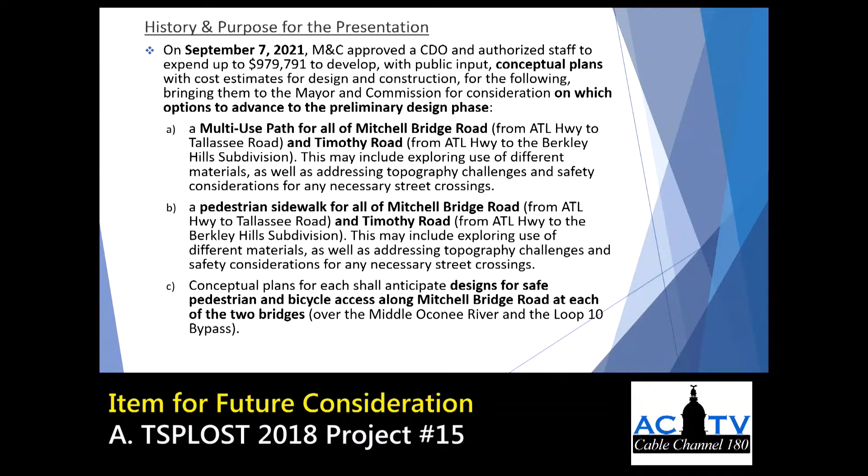We'll stop right here. On September 7th last year, one of the activities that y'all under CDO asked us to take a look at was multi-use path, pedestrian sidewalks, and bridges on these 2 corridors. So that's really the part of the effort that we're bringing to you tonight. We'll also bring back in a future consideration the $1.5 million that you set aside for some additional activities, considering some of the previous work that has been done. That's a future presentation that we'll bring back to you.

But for tonight, we'll just focus on the Mitchell Bridge Road and Timothy Road section. There's an area map that shows existing conditions. You see the existing sidewalk on the north end of Mitchell Bridge Road that parallels the creek, and it's in between the road. We'll have some environmental concerns there.

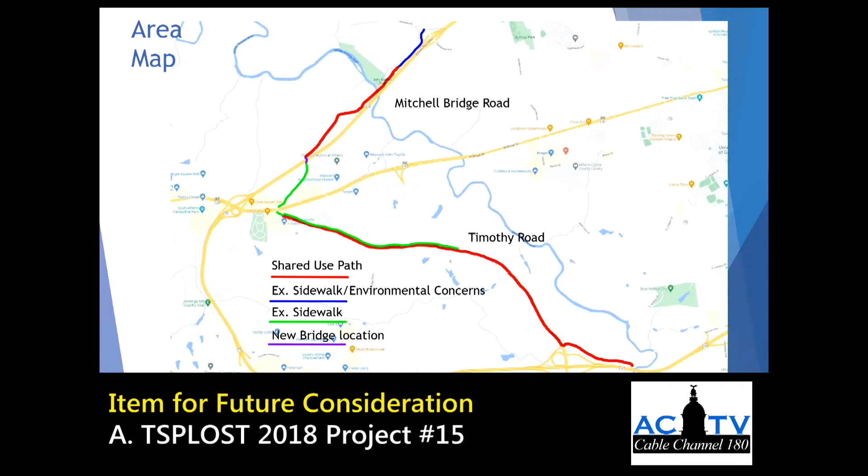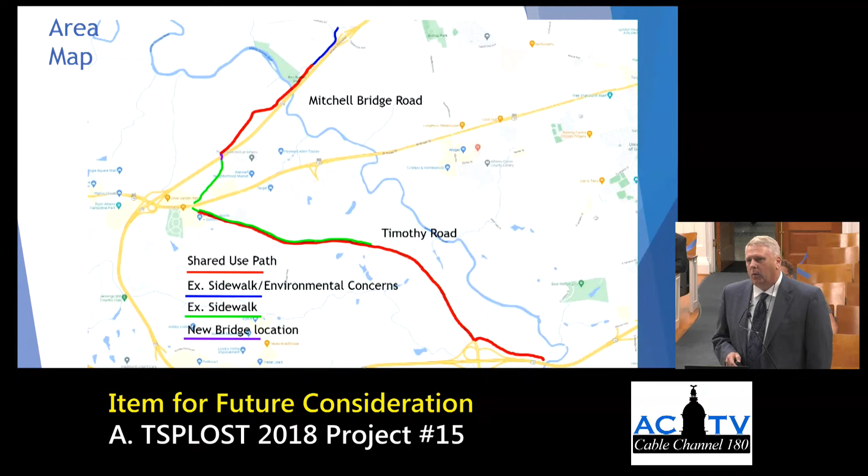Again, the red area along Mitchell Bridge Road has no facilities. For a bike ped facility across the loop on Mitchell Bridge, we would need a new bridge. There's not any existing facilities on the current one. From there into Atlanta Highway proper it has existing sidewalks on both sides. And then again from Timothy Road, from Atlanta Highway down to about Skyline, there's sidewalks in some places on both sides of the highway, and the roadway in some places meanders back and forth. Just a general overview there.

They say a picture's worth 1,000 words. These are some of the conditions along Mitchell Bridge that we would have to tackle. Of course, there's existing sidewalks in some areas, with no sidewalks at all or any facilities in others. The Loop 10 bridge and approach is very narrow, and it's through that curve. It's very hard to retrofit that structure unless you put a bike-ped-only bridge there or rebuild the entire structure. And then you have no facilities down to about 500 feet north of Ben Burton Park. Then there's that existing sidewalk that I mentioned a minute ago that just parallels the creek all the way around to Tallassee.

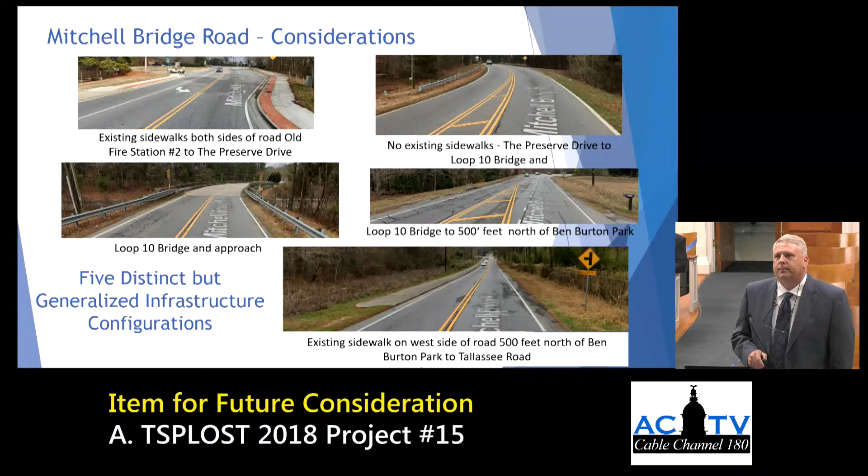Some of the considerations, again, are how do we utilize some of our existing infrastructure. One consideration would be to use what's there, of course, and then think about the loop. The connectivity across the loop, whether it be a standalone bike-ped bridge or a joint project with Transportation and Public Works to redo that structure entirely, you could build back and put bike-ped facilities on that structure.

One of the things that's moving now is going through the MPO process. I believe the mayor had an opportunity to speak with the DOT commissioner, and he's asked to look at Atlanta Highway, Mitchell Bridge Road, and Timothy Road as a planning effort, but wants it to go through the MPO process. So that's a future consideration that will be coming through, and it's moving through the MPO process, I believe, as we speak. We're also trying to utilize existing cost savings to figure out how we could use the bridge over the river without having to build a standalone facility or add on to that facility.

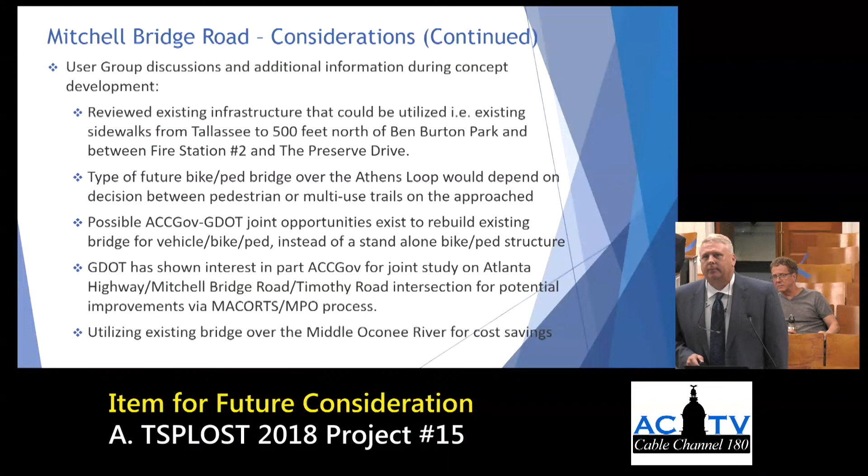Looking at it with bike ped facilities, the AIM plan, we went back, it's at comfort level 4, which is not comfortable for cyclists. When you consider some future projects like the Loop 10 Bridge or the Atlanta Highway interchange, some bike facility improvements may be better held to future considerations to allow those other things to mature.

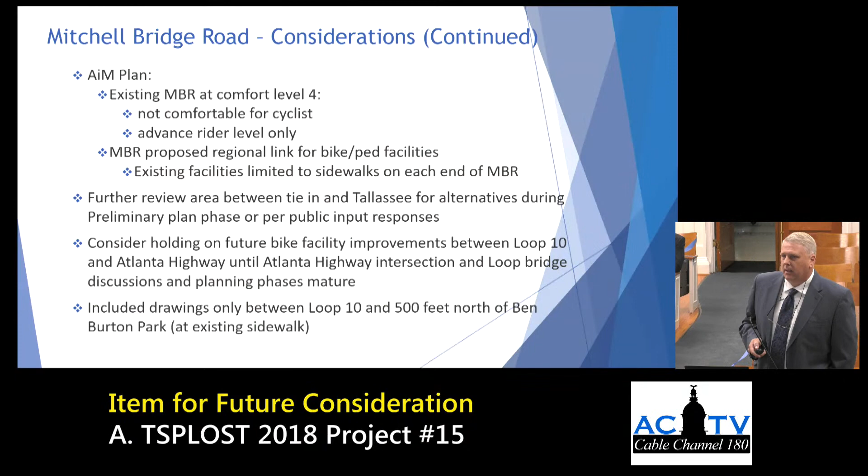So here we provided drawings between the loop and that existing sidewalk just north of the park. That distance is about 1.5 miles, and you can see the loop, and then all the residential components north of that, and the one subdivision and a little bit of duplex type structures on the south side of Mitchell Bridge.

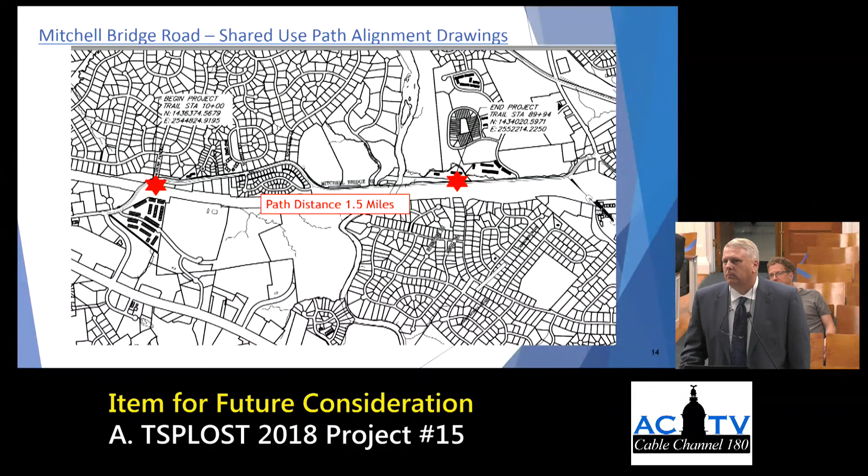Some engineering, some typical sections of what you're seeing. Can you go back to that picture so I can understand better? This is a path, this 1.5 mile path, on the top side between those two stars? Yes, ma'am, on the top side of Mitchell Bridge, on the north side. Okay, thank you.

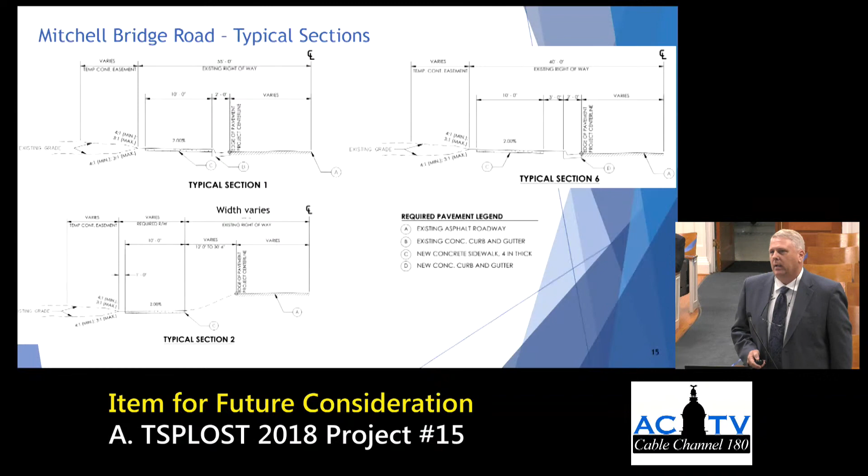One of the things y'all asked us to look at was, as we look through conceptual drawings, to look at the topography and how it may connect to who's connecting to it. So we took a deeper dive than normal conceptual drawings on these, and developed typical sections. There are several of them along through there. You can see typical section 9.

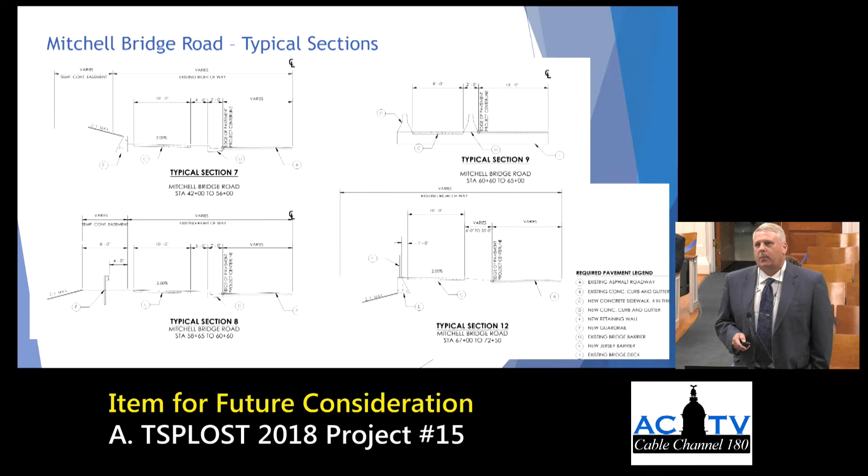That's where we've shown that we could put an 8-foot shared use path along the bridge over the river by putting a physical barrier there and moving those travel lanes inward. So several types of configurations there that we'd have to take into consideration.

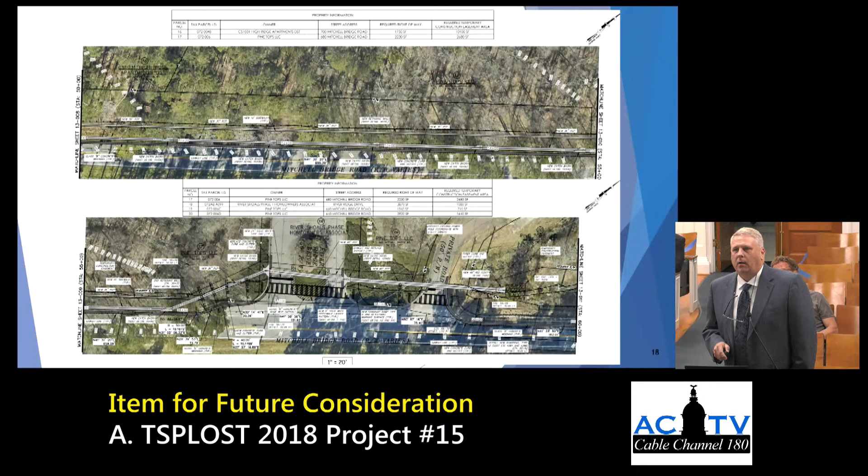Just another typical component, this one down near the curve. The apartment complex is on the top sheet. It's hard to see in this clip, but what we're trying to show is there's an extensive topography challenge there, so we can't push it too far off the roadway.

If you can't push it far off the roadway, what other things do you have to contend with? All that curve in there is super elevated back towards the north, so mainly it's pushing the road water to the top of the page. We had to pick up curb and gutter, drainage, that type of material through there, and that's a heavily steep slope we'd have to pull back a significant retaining wall to handle.

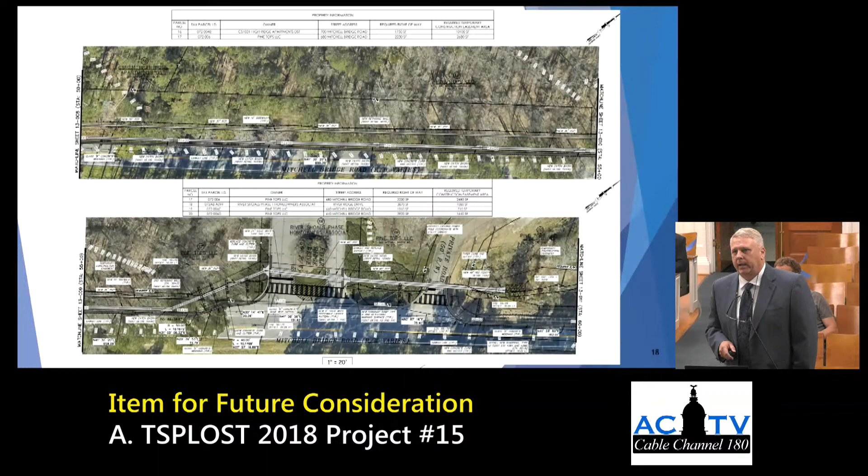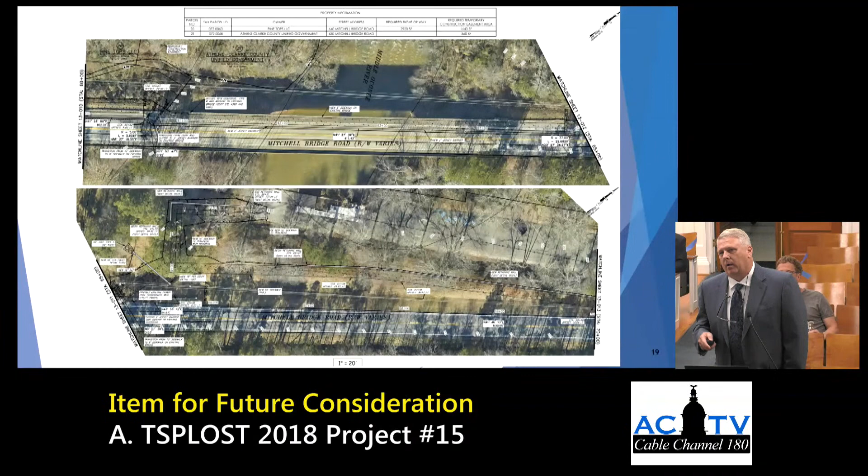The bottom half of that page takes you on up to the park. So that's some general and a little bit of specifics about that corridor area. From a construction cost standpoint, for a shared use path including a bridge for the whole Atlanta Highway all the way to Tallassee, conceptually we're estimating about $17.4 million.

Of course, when you go to the sidewalk-only option that you asked us to look at, reusing a lot of the same alignment, but then you remove the areas that already have an existing sidewalk, so you would have no cost there.

And we've also included a cost of the standalone bridge there as well. So if you only wanted sidewalk, you could have that connectivity, excluding the bridge, for a little less than $5 million.

And that would make that corridor completely pedestrian friendly, again excluding the bridge. But to do the shared use path, it takes a little bit more to get there. When you say excluding the bridge, there would be no way to actually walk safely across without spending money on that bridge, right? Correct. So I'm curious where that sidewalk-only estimate doesn't include the bridge. The shared use path does include the bridge, and the bottom total at $8 million includes a bike pedestrian only bridge, including the 4.8 with the sidewalk.

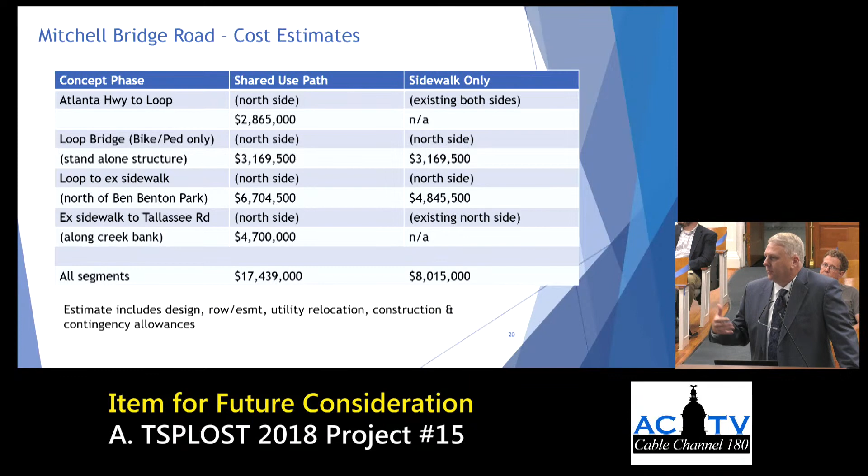And we even took some time to look at possibly what we could do on the other side of the road. Then you start looking at additional drainage, tying in with DOT. When you're talking about a shared use path, preferably 10-foot wide, that's building a whole new lane. And then do you move the curb line to get that separation that you want? So there's several considerations.

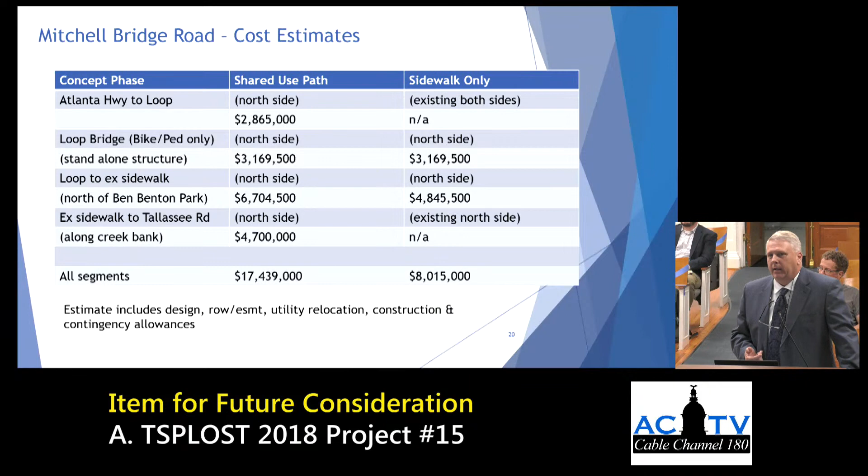It's a high estimate, but there's also, at a conceptual level, along that creek bank, if you built a retaining wall to widen it out, not only is it an earth retaining wall that we need to look at, but the creek there, we want to make sure it's properly designed below what we call scour level to make sure the creek doesn't wash it out.

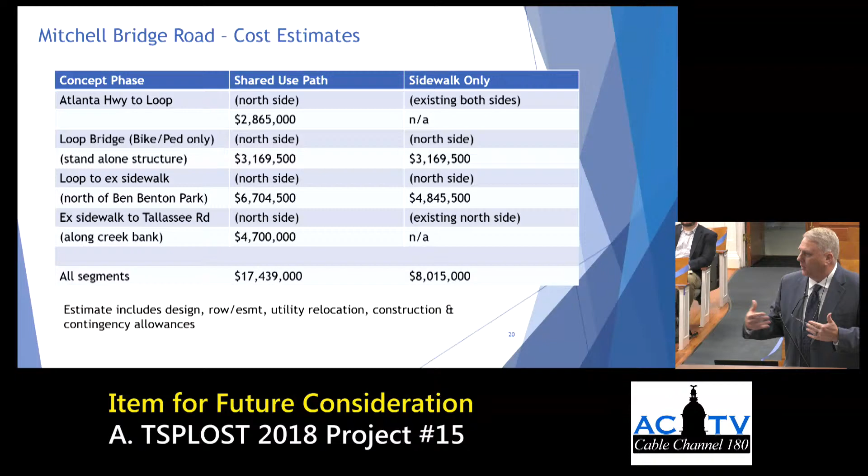So I don't say it's elevated, I just want to say it's an expensive concept, something we'd continue to look at as we move forward if that's the direction we take. And we also considered that, just like the bridge over the loop, there's a future project or consideration for a concept. We also know that, working with Transportation and Public Works, there's the Tallassee Road intersection tie-in, how that may work or widen, that intersection.

So there's a lot of moving parts there. We just want to get to a point where y'all feel comfortable that what we're doing is moving forward properly with the dollars that we have, and I don't want to say just forecasting the what-ifs, but we just want to be careful with that.

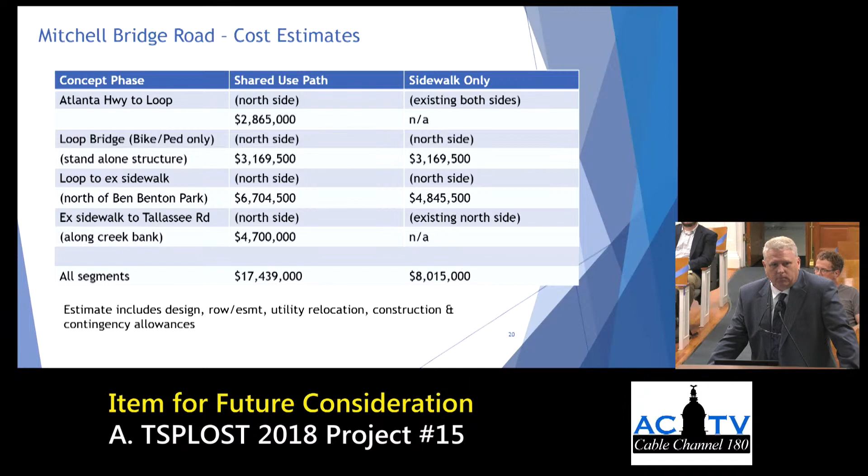I appreciate that, and thinking about this, I'll grab Mike. When I worked out on the corner of Tallassee and Mitchell Bridge, I'd often ride my bike to and from near downtown where I live, and would ride on that sidewalk with that extra protection in both directions. So if we were to think about sequencing and phasing this, I might make a pitch for just retaining the existing conditions there in the near term, and looking towards some of those other segments that are going to attach to neighborhoods and get us safely over the loop too.

Yeah, and I think I would concur with that, Mayor, that it's important to build the connectivity first and then go from there. I know in the Missing Middle report, they targeted this area as part of one that could see some of the Missing Middle type activity, but it's not walkable. And they noticed there's potential there for that.

And I'll say this, and Blaine's probably going to jump across here and choke me when I say this, but have we looked at, and maybe this body needs to consider, in some areas where we're trying to create connectivity, should we not look at the materials being used in order to get to the price, in order to meet our budget? I mean, I know asphalt is not the ideal thing to use, and it does require a lot of maintenance, but it is a little bit cheaper than the concrete we see today.

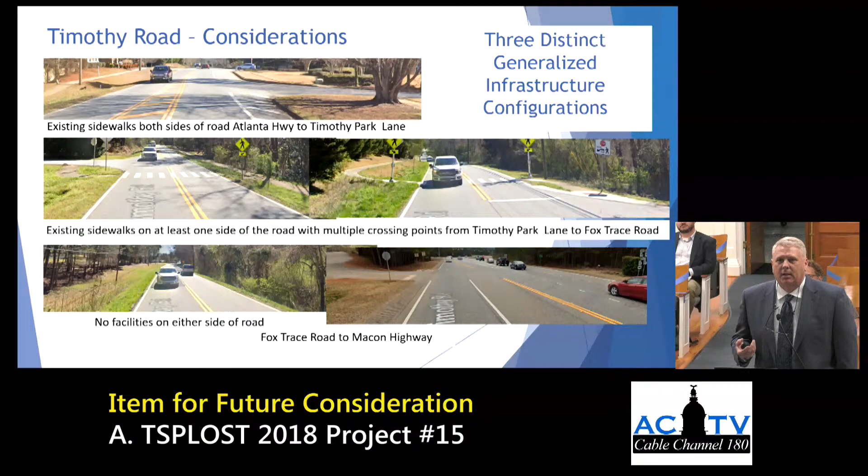And then we did the same thought process on Timothy Road. Again, there's several different categories - general considerations, existing sidewalk on both sides, existing sidewalk on one where it crosses, no facilities at all. So you've got a variety of that type. Again, some of the user group considerations - utilize existing infrastructure, and again the joint interest of GDOT with the interchange or the intersection at Atlanta Highway.

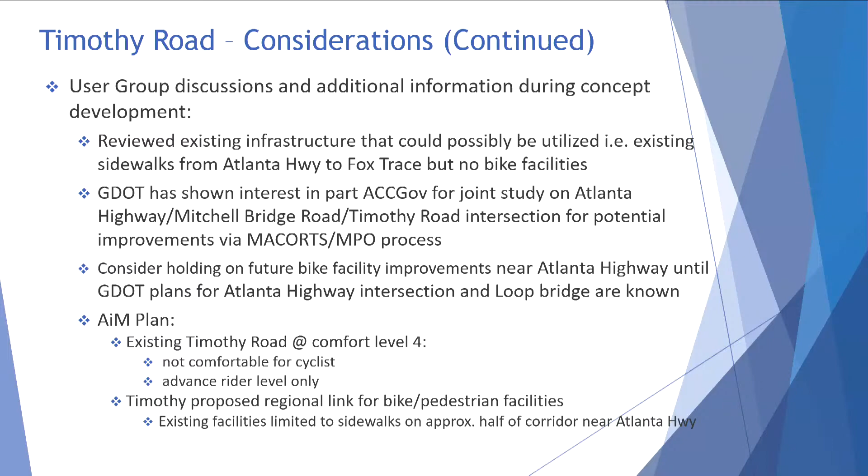Looking at the AIM plan, what level of comfort's there, it's not comfortable for cyclists. So there are several considerations we took into account. We did take the opportunity to walk every one of these. So it's not that we just looked at it from a high level, we put boots on the ground.

We broke this corridor up into 3 different sections. There's basically from Academy down to Skyline, and then we developed 2 alternatives between Skyline and the Loop. Then you've got Timothy, the remainder of Timothy down to Macon Highway.

The terrain, topography, existing utilities, those kind of things just brought us to the point that those seem like the reasonable alternatives to put forth.

You can see the mileage there in between. The difference between alignment A is all on the south side until you get to Timothy and the Loop, you cross over, and then you're on the north side of Timothy down to Macon Highway.

And then alternate B from a bigger scheme is between the yellow star and the blue star, there's an alternative on the north side. That section of that corridor could easily be utilized for either shared use path.

Again, we looked at these as shared use path, knowing that we could always make it a little bit narrower, tried to focus that thought process as we move forward. And again, sometimes it's not right next to the edge of the road or right next to the sidewalk because of topography or trying to get that separation for bike pedestrians. So we try to move that forward in that line of thinking.

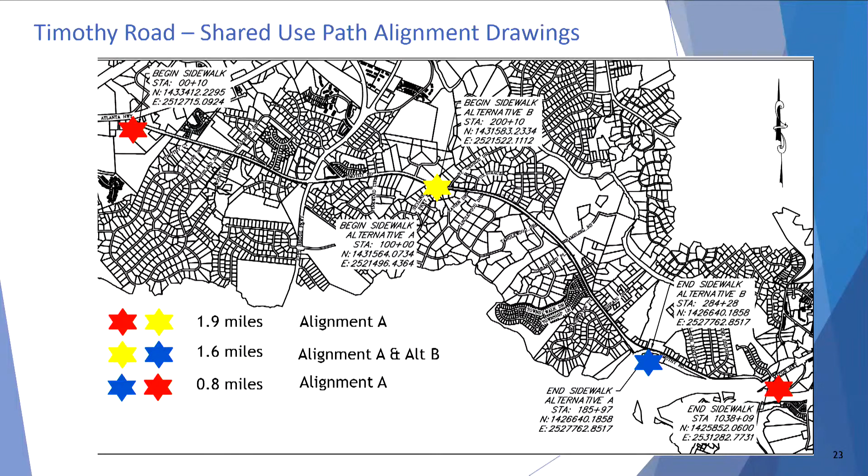Again, typical sections, there's several pages of those, just trying to educate, if that's the right word, to let you know what all the considerations had to go into this.

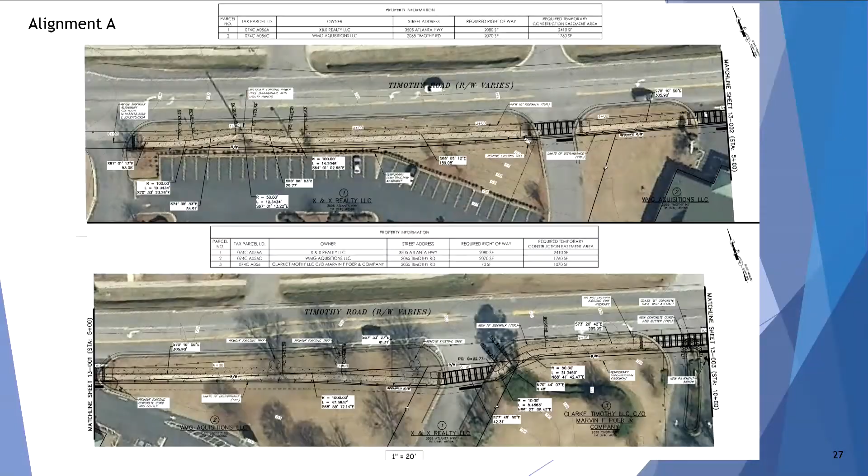Just a couple sample slides of the conceptual type plans. This would be remove and replace from basically Academy, going across Epps Bridge Parkway, just tying into some of the existing facility there and moving across that, possibly doing some additional striping to make it a little bit clearer.

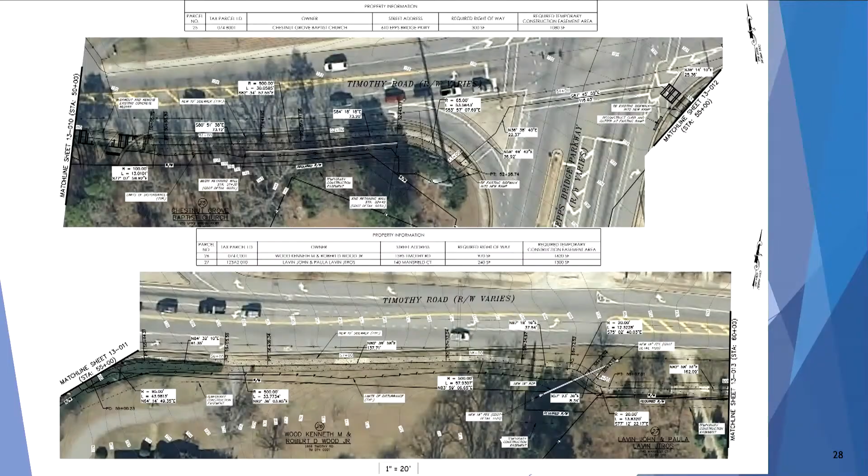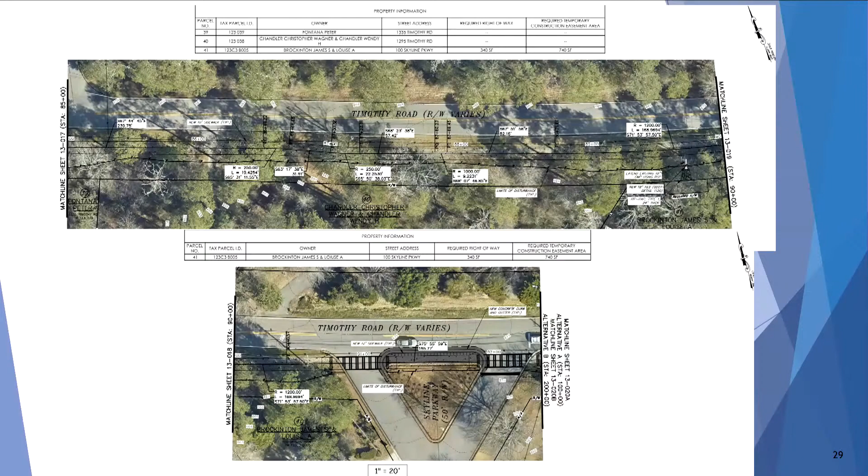Then we move down, and of course you see Skyline there, and that brings us to kind of the A and B change, but the rest of these slides is the alternate A along the south side. Again, just general type construction along the side of the road where it best fits. Lots of storm drain that we need to take care of, and an extremely wide right of way there that we get to utilize.

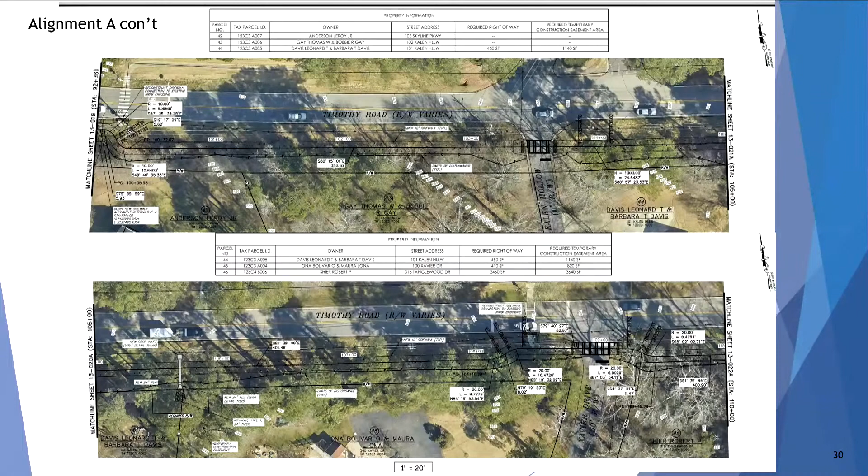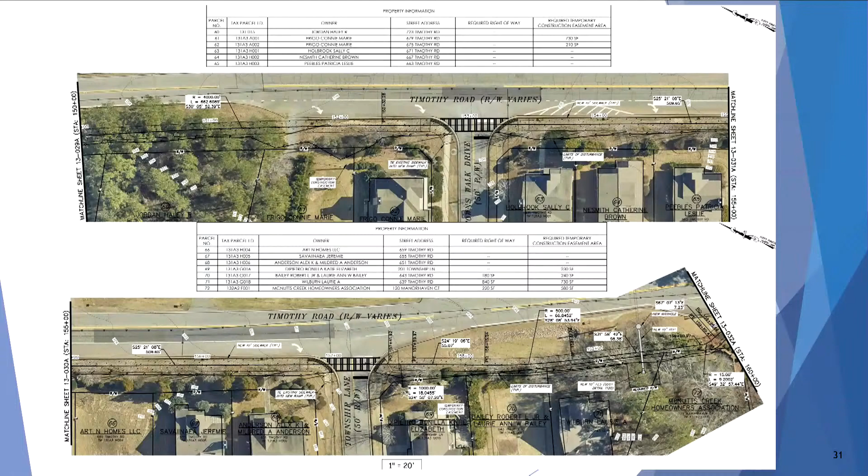This was, I'd say, an anomaly down that Towns Walk area. They have that turn lane, the right-hand turn lane. So one of the benefits of having that turn lane there is we get to utilize it as a space separator from the travel lane. So we can put the facility right next to the curb and gutter, and maintain most of those people's front yards the way they exist.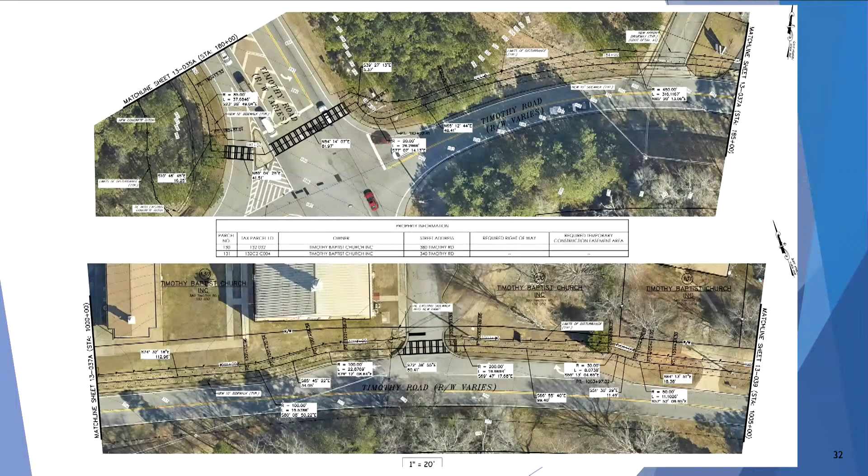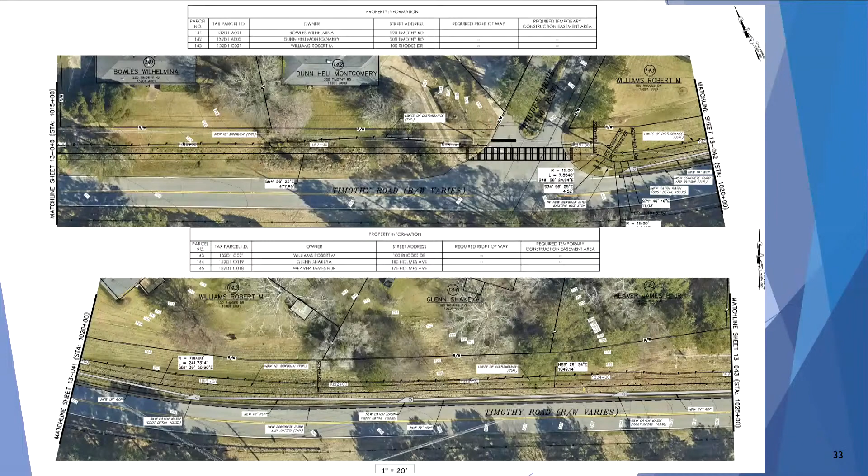Then we shoot on down, and you can see the crosswalk design that moves us through that signalized intersection to the north side of Timothy, down in front of the church. We stay on that side of the road, shoot down to the subdivision, and then continue on the north side, trying to end up at logical termini down at the existing development on Macon Highway.

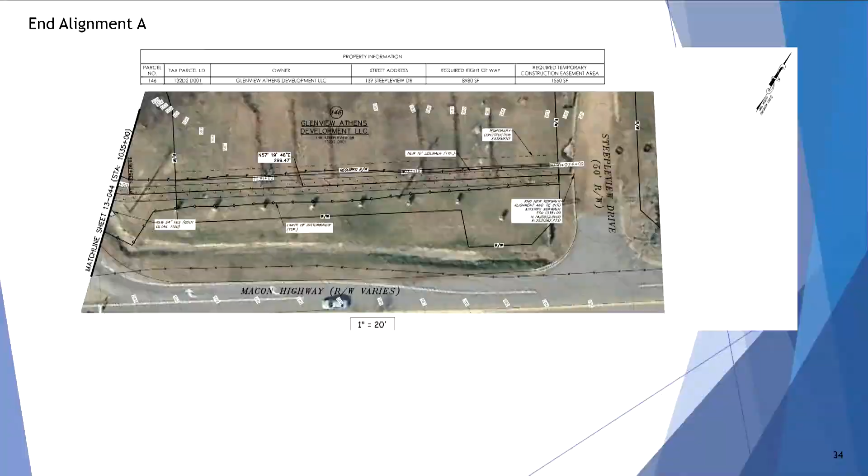So that's kind of the end of alignment A. Alignment B, we pick up at Skyline, just to the left. There's an existing crosswalk where that sidewalk is, and then we cross over and just follow the north side of the highway.

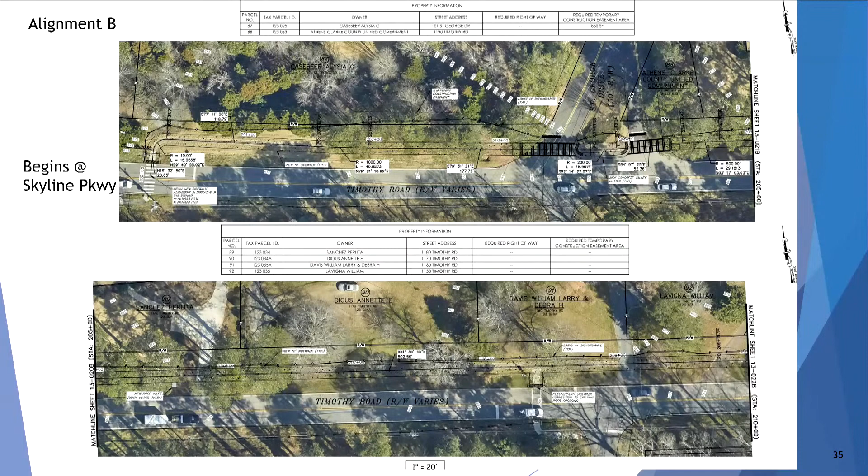North side of the roadway down - this is just a typical north side section. Down and across, that's in front of the Unitarian Universalist Fellowship. You can see their parking lot and their facilities.

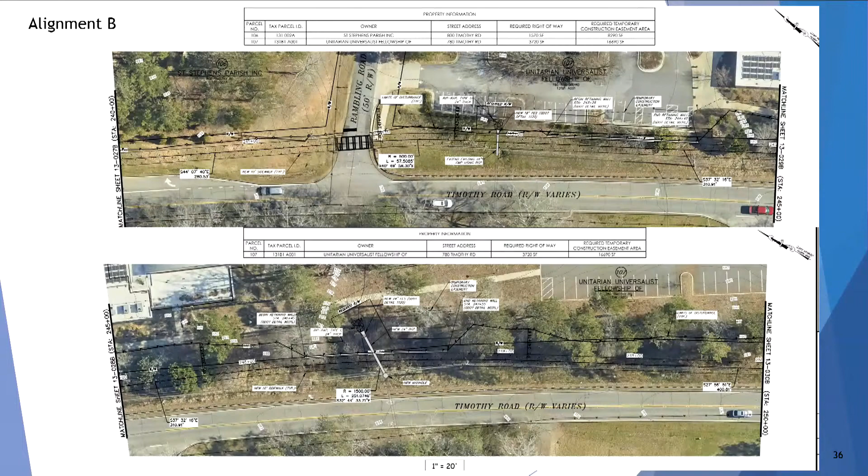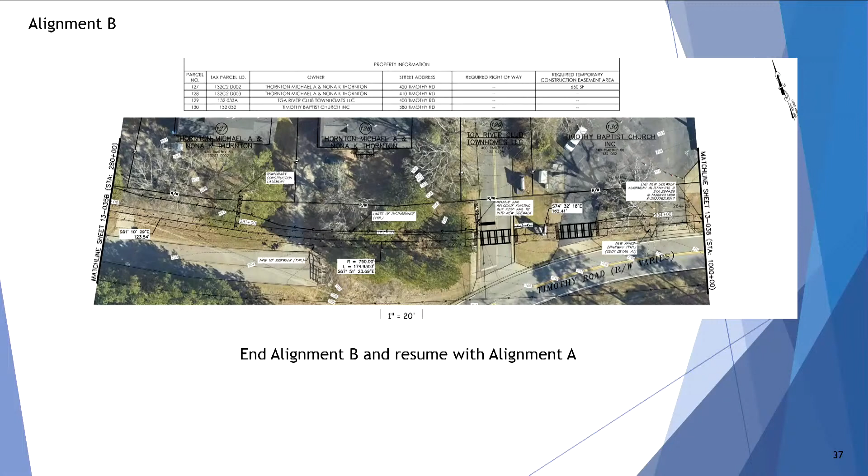Again, we just continue to move on down the north side to where Timothy ties in at the red light, off the page, but it just follows more in a linear fashion in the old right-of-way of the old Timothy Road, and then we connect back up right there in front of Timothy Baptist, and it's the same alignment as we just showed you.

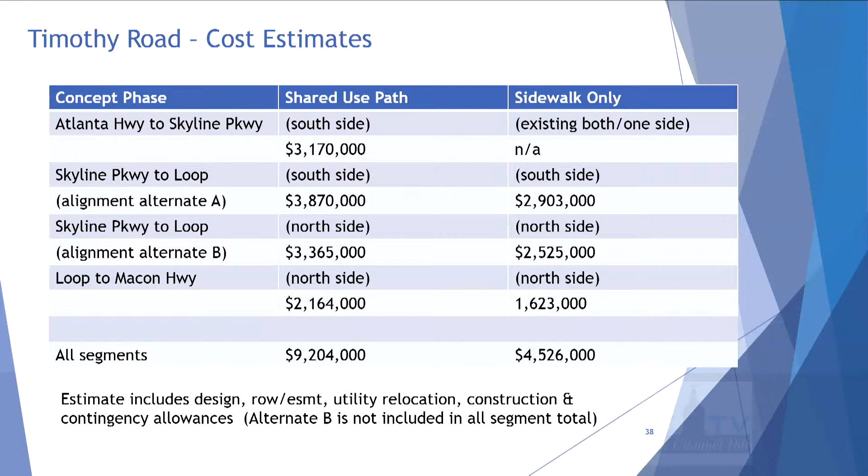So moving those conceptual ideas through our costing estimates: if you did a true south shared use path from what was shown, you end up with about a $9.2 million cost estimate. And if you do a sidewalk only, you're at about $4.5 million, tying into some of the existing facilities that you have.

So am I correct that these totals include completing the facilities on both sides of the street on Timothy? No, sir. It would complete a linear path on one side only.

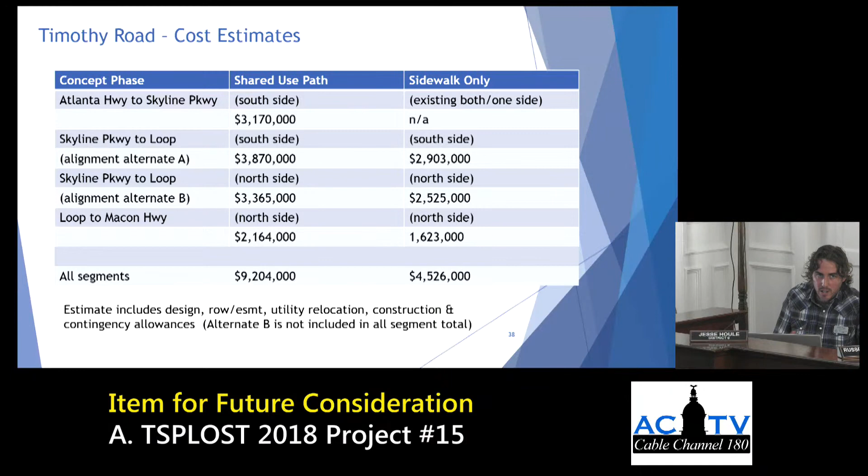Sorry, I lost you when you conveyed that, I think, quite clearly earlier on. So there's one side at any given point of the road. It just switches which side it's on.

And when we walked it, we took into consideration the vertical curvature of the road, sight distances, those kinds of things, to try to make sure we understood what the implications may or may not be.

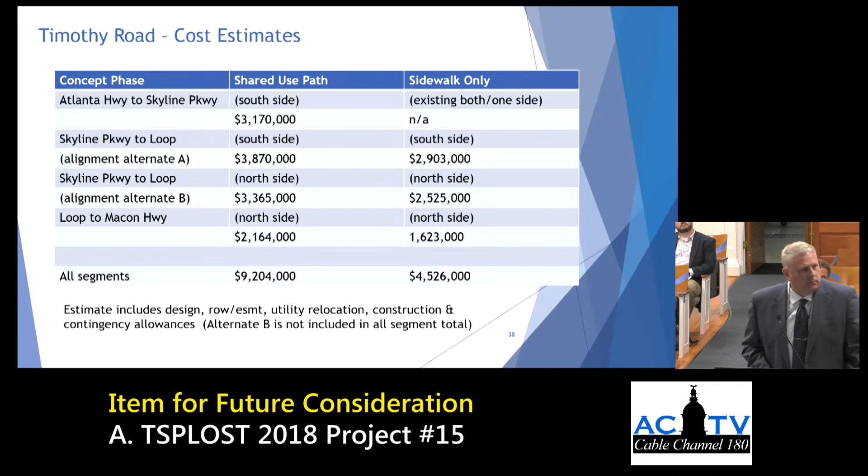Patrick? Yeah, I just want to comment that from a safety issue, I'm not a big fan of when sidewalks cross busy roads. So just for edification for my colleagues, it poses a danger for drivers and for walkers where a driver may not see. So I just want to put that out there.

Derek, are there some mitigations you'd anticipate where the segment might move from the north side to the south side? Possibly, yes, sir. This is informational tonight, and we want to take this to the public to get their opinion on how they may or may not use this corridor and the other corridor.

We've kicked around some ideas on traffic calming activities in certain locations. Of course, we can't stop traffic, or don't want to—that makes it just more dangerous. Red lights take warrants and those kinds of things. So we don't believe there are drastic measures we can take, but we believe we can improve some signage and visibility in those areas to make it as safe as possible.

Carol? I'm looking at the next slide, the revenue slide, showing TSPLOST 2018. You may have covered this, but on the 2023 program there's another $8 million for Atlanta Highway, Broad Street. What's the process—is that going to be a completely different user group, or an extension of this? Are we considering that money? And as a reminder, are there other projects the user group has prioritized as well for these buckets of money?

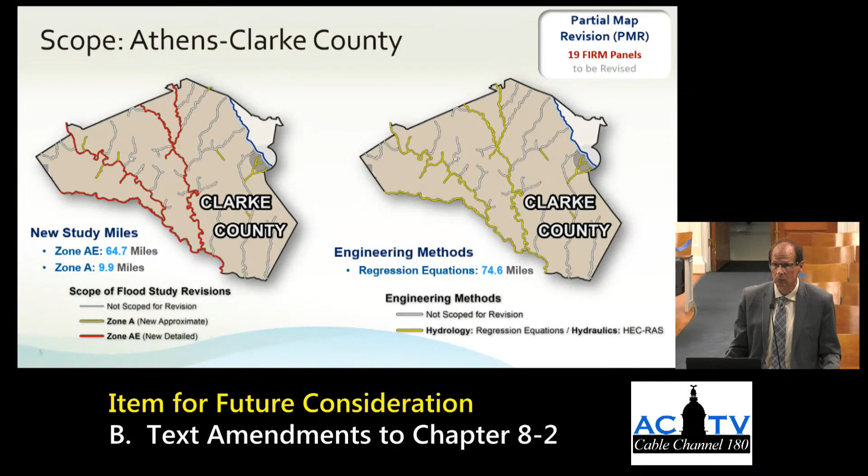If you don't mind, could you distinguish between the two images real quickly at a high level? What is one versus the other? It seems like we're seeing double there, doesn't it?

I will admit I stole these slides from the Georgia Emergency Management Agency, and the way they did this, the left side has different information than the right side, but the left side has the new maps. The red ones have the elevations associated with those flood maps, and the yellow ones are new mapping, but don't have elevations associated with them. On the right side, it's just the engineering methods. When they say regression equations, that's how they come up with the flows used to model these flood maps - they use regression equations on all the streams that were redone. And the hydraulics are saying HEC-RAS, that's a popular program to convert those flow rates into elevations.

So, all right. Todd, I'm sorry. Yes. Can you go back to the previous slide?

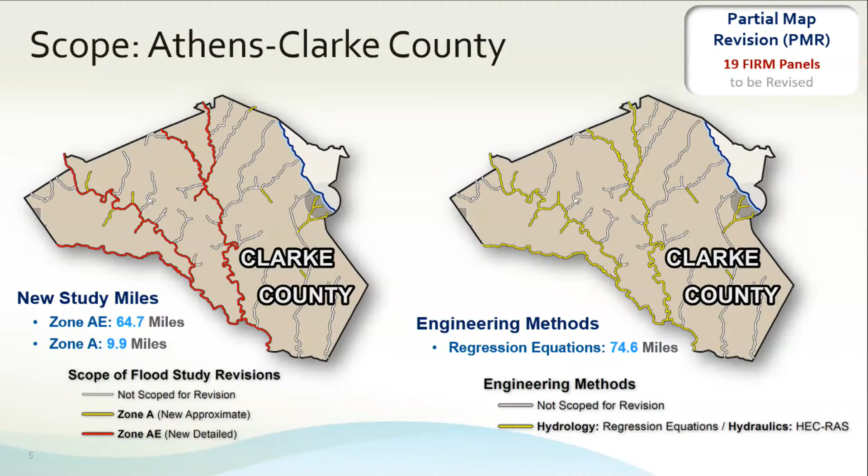The white spot above Winterville, what is that? Is that where the Broad River watershed begins? I'm not sure, that's a good question. It looks like it's outside of Athens-Clarke County. I think the northeast is the Broad River watershed versus the bulk of the county, which is the Oconee. That makes sense, because you see the headwaters of several streams right at the demarcation. Most of Athens-Clarke County does go into the Oconee, but part of it goes the other way and ends up in the Savannah, weirdly enough.

This is just what a typical flood map looks like. This happens to be the middle Oconee River at the loop on the south side. If someone owns a building in a flood mapped area and has a federally backed mortgage, they are required to purchase flood insurance. So the FEMA flood maps are associated with flood insurance. Anyone can purchase federally backed flood insurance, whether they are in a FEMA flood mapped area or not - you can live at the top of a mountain and purchase flood insurance if you want to. Property owners are only required to purchase flood insurance if they are in a flood mapped area and have a federally backed mortgage.

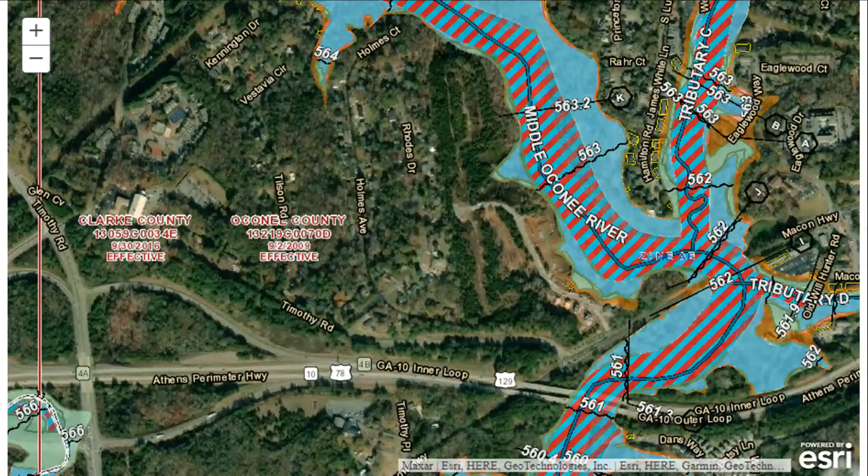So why is FEMA updating the maps? The main reason is that better topographic data is available than before, so the new maps are just more accurate. They give some numbers in the upper left - when they say effective study, that's what we're using now: 8 foot plus or minus vertical accuracy, 33 foot plus or minus horizontal, and we're going to something much better than that with the new LiDAR mapping. So it's an improvement in the mapping, and that's why they continually update the maps.

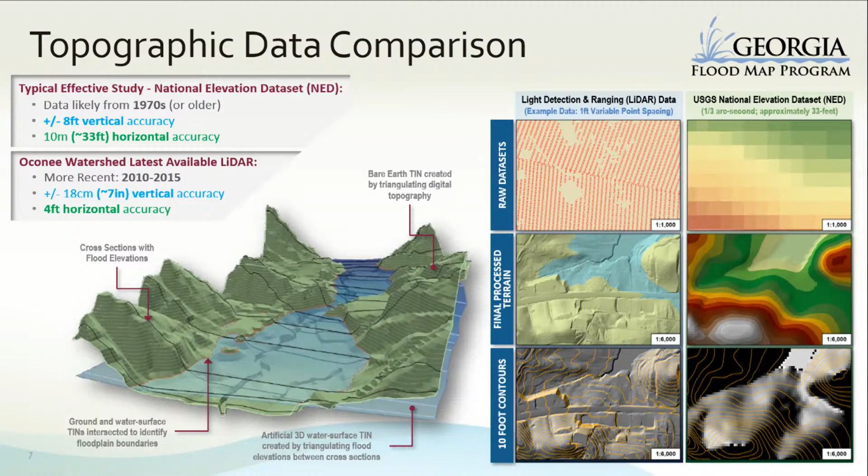So these are the draft results, and what we can see here is that about 25 were added to the special flood hazard area, and over 100 were removed. Actually, as we went through this process, I think it's closer to just 20 that were added, because we saw some that were added that really shouldn't have been. There were also some buildings that were already in a flood mapped area, and the flood elevation had gone up as a result of the new mapping. So we focused our notification efforts on the people who were newly added, along with those for whom the flood elevation had increased - those two groups were the ones we thought we should make a special effort to notify.

Well Todd, if I might too - anecdotally, my experience in the past when we had flood map revisions is generally you just end up including more and more structures as they revise that. But I want to draw a point that Todd's already mentioned, that with the increased accuracy of the mapping, we're actually removing some structures out of the flood zone. Is that right? That is correct, and we always want to make sure that's the right thing to do. We questioned the mapping consultant quite closely about all the changes we saw, to make sure they were sure these were the right changes, and they went back and double-checked and sometimes triple-checked to make sure what they were doing was accurate. So it is good news in that sense that more were removed than were added.

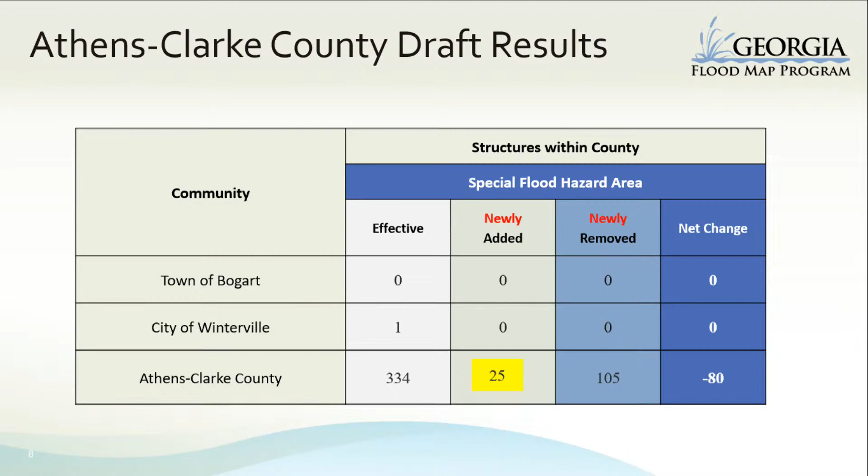The maps aren't effective until September 15th, but my understanding is they will be contacted by their lenders. I'd imagine there could be some good changes for them. They may very well want to continue with their flood insurance even if they're removed, since they can probably get a better rate, a preferred risk rate as opposed to high hazard. That's the advantage for them.

We had the required notification we had to do, and that was in the newspaper. We did that a couple times. You know, who's going to see that? Some people will, but not all that many.

So we did these postcards also. This was the front side, and we sent these to everyone who was newly added, or for whom the flood elevation was increasing, and this was the back side. What we're trying to do is let people know about these virtual open house meetings.

They were scheduled so residents could get their flood mapping questions answered. The Public Information Office created a website just for this and posted social media notifications as well. We also went door to door for the people who were newly added to the flood mapped areas, so we felt pretty good about our notification effort.

I have seen cases in other communities where FEMA maps were updated and residents most affected by those changes were puzzled when their bank informed them of the need to purchase flood insurance, or they sold the property, because that's usually when it happens. So we wanted to make sure that didn't happen here, that everyone knew what was going on.

These meetings actually went quite well. We had someone there from the state, Georgia Department of Natural Resources, GEMA. We had someone from the modeling agency, Dewberry, who was the consultant. We had someone from FEMA, and usually someone from our office as well. I thought those meetings went really great. There were maybe 10 of those meetings set up.

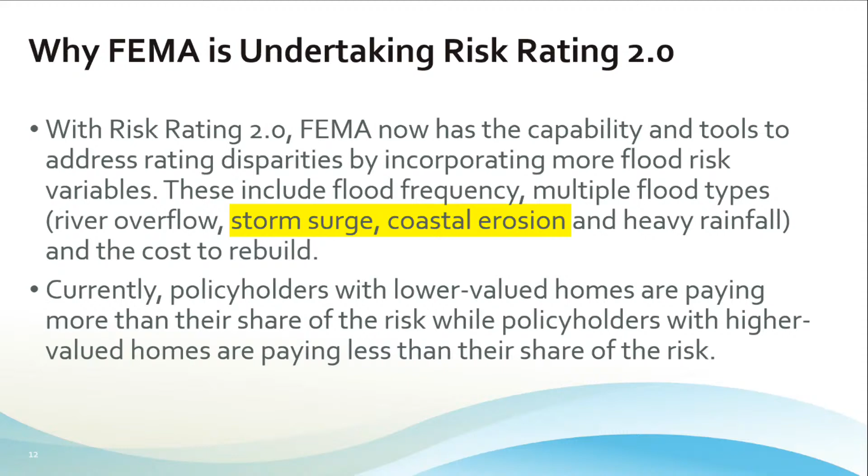So, does anyone have any questions? Just anything at all. I brought along Bob Fawcett, our floodplain administrator, because I was so concerned that we would be inundated by questions. Oh, there we go.

I just had one thought, I guess, actually, and I feel like you covered this really well, and I really admire the robust outreach that you all did, going door to door. Nothing beats it. So kudos for that.

Just following up on what Commissioner Denson raised, it's rare that people are eager to let you know when you don't need to be paying for something anymore. So I feel like it might be good for us to send a postcard to the 105 residents. Can't be too much staff time, hopefully, and it's less than $100 in postage, but I feel like that'd be worthwhile to do right by our residents. We could probably swing that.

The goal with this presentation is to present an update of our program and some progress that's been made since the last time you saw some of this information. We'd also like to discuss culvert replacements as well as rehabilitation, which is another option in our toolbox when addressing these issues.

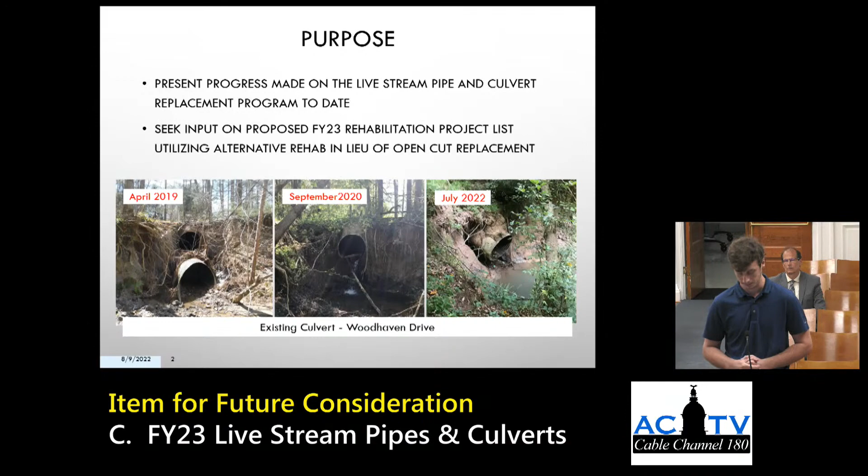We're going to look at an outlook of the program's budget and discuss the deficit list as that is related to that.

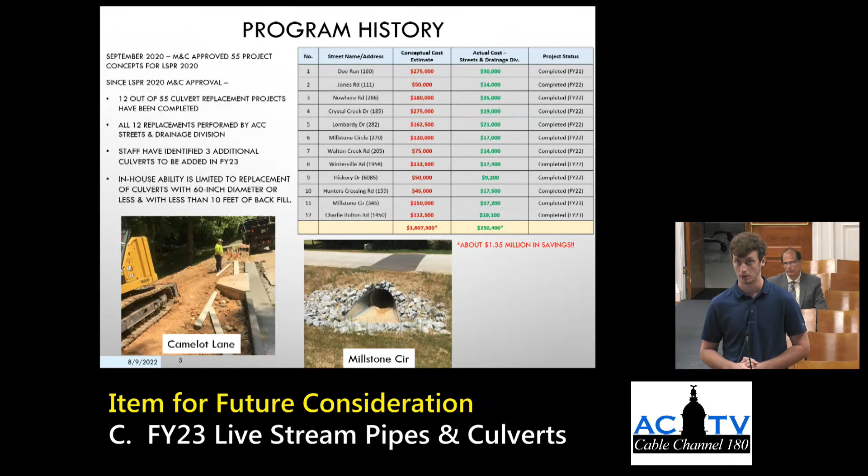To start with some of the program's history, as I mentioned, this would have been presented to you all in 2020. In September 2020, the Mayor and Commission approved a list of 55 projects. The concepts were approved as part of the LSPR 2020 program.

Since then, 12 of those 55 projects have been fully replaced. Those projects' construction have been completed, and were all completed by our in-house Streets and Drainage Division within our department.

In the table on the right-hand side, you'll see those 12 projects listed with two different columns for costs. The red column shows the conceptual cost estimates put together if those projects were to be completed by a contractor and fully replaced. The green column shows the actual cost expended to complete those construction projects. You'll see there was significant savings, largely due to being able to complete those with our in-house forces. So those costs in green represent labor and materials for those projects.

Some other things that have happened since 2020: staff have identified three additional culverts that are failing and are in need of being added to this program.

Another note on our Streets and Drainage Division, our in-house construction crews' realm of operation for these projects is any culvert with a diameter of 60 inches or less, and any culvert that has less than 10 feet of backfill. So if it's deeper than 10 feet beneath the road or larger than 60 inches in diameter, the scope of that construction is going to require some outside contractor help.

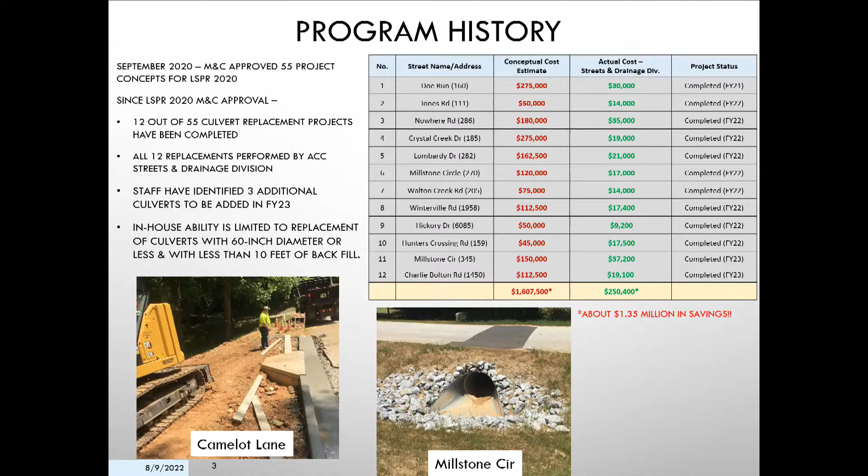Well, my knee-jerk reaction is there are some safety considerations to stabilize cuts that deep. But I can give you a better answer on that if you give me some time with staff.

Yeah, I mean, I just feel like I'd kind of rather see local employees taking on this work, knowing that they'll be getting fair wages from the local government, and knowing that the profits aren't going to executives and shareholders.

I would like to see some numbers on what it would take for us to be able to do more of this in-house. I'll ask, I won't put Jason on the spot, but maybe Steven - the 250,000, the green number - is that fully burdened with the staff time as well?

And if we've answered your question, Commissioner Link, if we could go to the list of the projects, I just want to offer this to y'all.

So several years ago, when the live stream replacement program was first initiated, the estimate then was roughly $22 million. Since then, I think y'all have done a lot of refinement and reanalysis, so this is the latest and greatest. At the time, the commission asked, well, how do you want to pay for this? Because the utility does not generate enough funds to tackle something this sizable.

At the time, the commission said, well, we gave them several options to consider, and they said of the 22 million, 11 million should go to the upcoming SPLOST, and the other 11 million we would look to when we revisit the utility and the rate structure, that might carry some of the burden, which means an increase there.

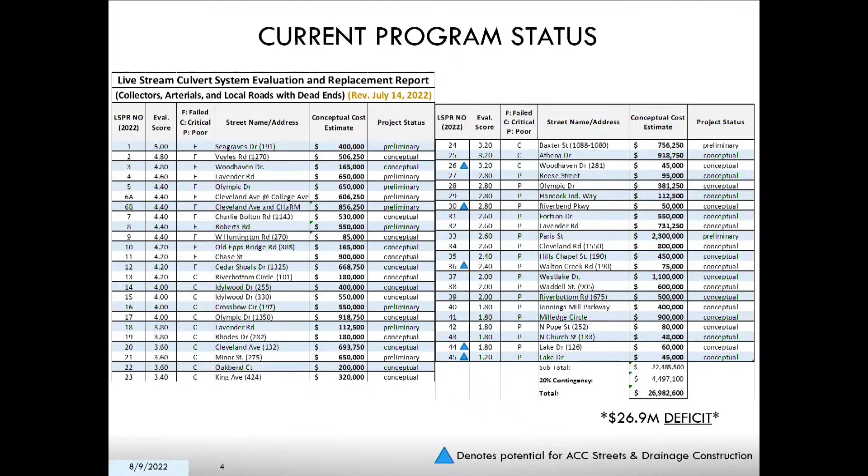Is there a contingency plan in case, just one bad rain, that we have the funding for at least some of these to replace them?

The farther along in the program we get, the more and more confident we feel as time goes on that we have a solid grasp and understanding of which locations are sort of right on the brink, and we do monitor those more frequently than others.

And we do have the enterprise funds and other funding sources that we'll get into later - we do have some money in our pocket that could be expended if needed, if that failure does arise, as has happened in the past. And Jason, I don't mean to hijack your presentation.

So a good case in point is Athena Drive. Staff's monitoring it, looks like everything's going to be okay for a few years, and then a rain event happens, and then we see a sinking in the pavement - telltale sign - and all of a sudden that jumps to the forefront.

When we look at federal dollars for roads, does that include or could include culverts as well? Yes, we'll have more about that in the presentation as well. Good question, though. Is there another question at this point?

We have 3.5 million in the TSPLOST, and if my back-of-the-napkin math is right, it looks like y'all were able to very impressively come in at 15% of the estimated cost, a huge reduction in the overall estimated cost of those projects. I hear you that there's a safety concern, so maybe that makes this a non-starter, but speaking to Commissioner Link's point, if there's a way to bring this in-house, knowing sooner than later when we're discussing the TSPLOST project hearing, I imagine there would be upfront costs for machinery that we might do well to get in the door to then achieve these things for a much lower price.

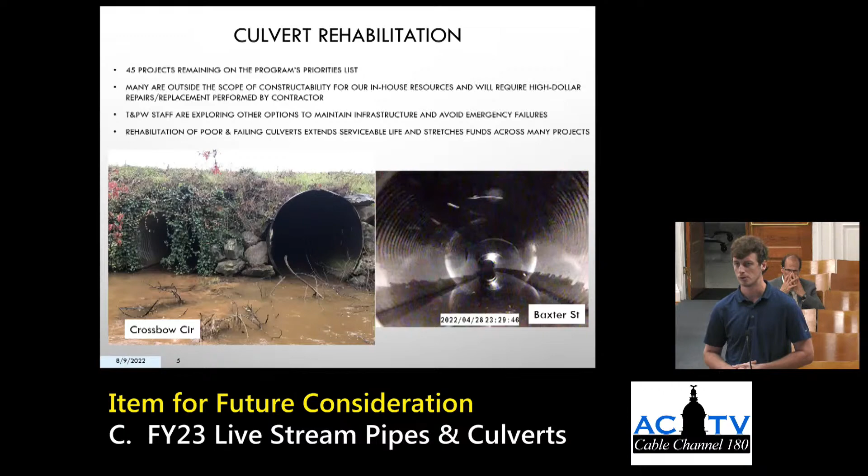Before we get into the lining option, which is a more specialized technology, we look at certain criteria for different culverts to decide if rehab would be a good application for that site. Some of those are high replacement cost and total culvert length—a longer length drives up cost with more materials—as well as special site constraints. If the culvert is located very deep beneath the roadway, it makes traditional open cut replacement quite complicated. We also look at whether the culvert system is already adequately conveying enough water.

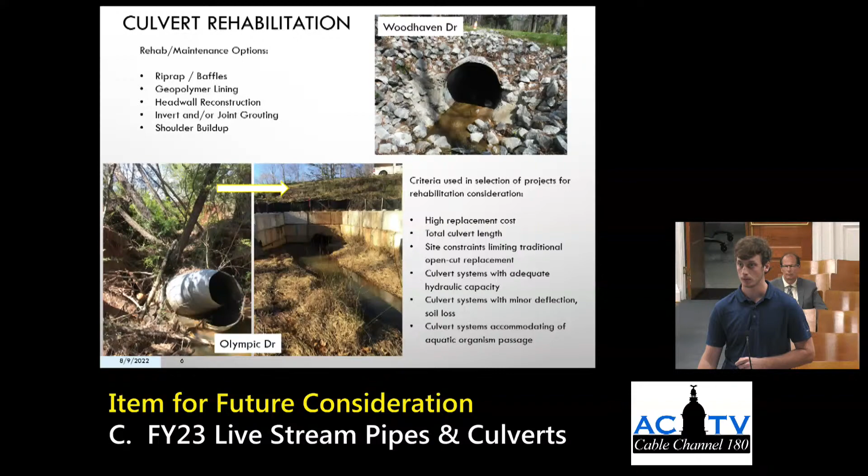In our conceptual cost estimates, sometimes we decide a location needs a larger pipe when replaced; other times the pipe is already the right size but just rusting out, which could be a good candidate for rehab. If the culvert system has only minor soil loss or minor deflection—not completely structurally bad—we can perhaps rehab it. Lastly, we consider aquatic organism passage: when pipe size is too small, it forces water out at high velocities, creating erosive high-energy outlets where water waterfalls over the outfall edge above the stream bed elevation, creating a habitat fragmentation threat. So we want to ensure rehabbing won't create a big problem for the site.

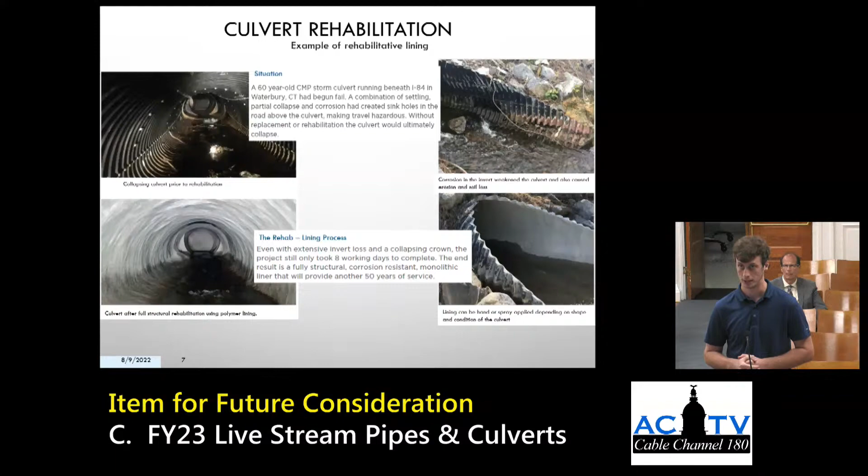So, talked about the geopolymer lining option. It's a slightly more specialized technique. We've been in discussion with a company that specializes in a technology where they spray apply or hand apply this polymer lining. The lining is fully structural and corrosion resistant, so it's going to prolong the service life of a pipe where it's applied quite considerably, 25 to 50 years.

It's a common situation across the country and here in our county, where these pipes are rusty, they're metal, they're corroding, they're collapsing, and this type of application could be a really good option for us to spread funding for what may help replace one large project.

It said on there that by doing this, it would provide another 50 years of service. Is that correct? That is what the company claims, and there are several case studies they've provided that we as staff are confident in. They do provide an engineered solution, so it's not just some company selling a product. They stand by it, and it's fully structural and corrosion resistant, and that's a big reason why it extends the life much longer than some of the other less intensive rehab methods.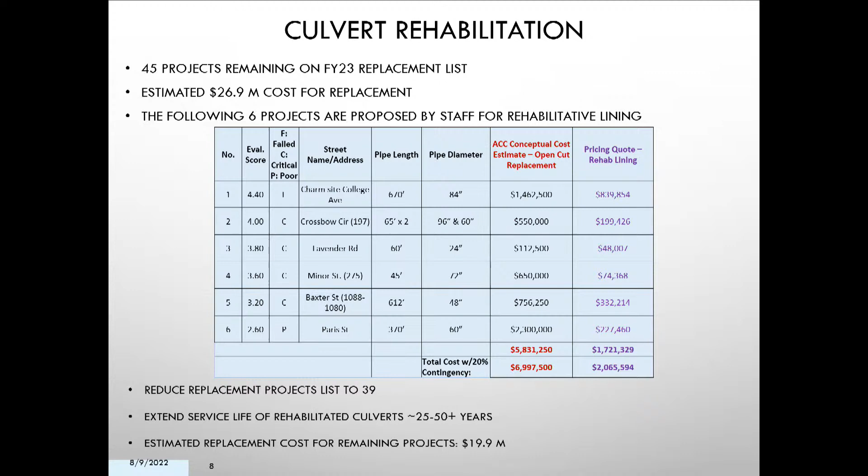We have a couple of different options ahead of us because of the bipartisan infrastructure law and potential grant funding coming our way. So we've broken it up using the current and future fund totals. We have $7.46 million. If we subtracted the cost of the proposed rehabilitative lining, which was $2 million, we'd be left with $5.4 million in our total program funds.

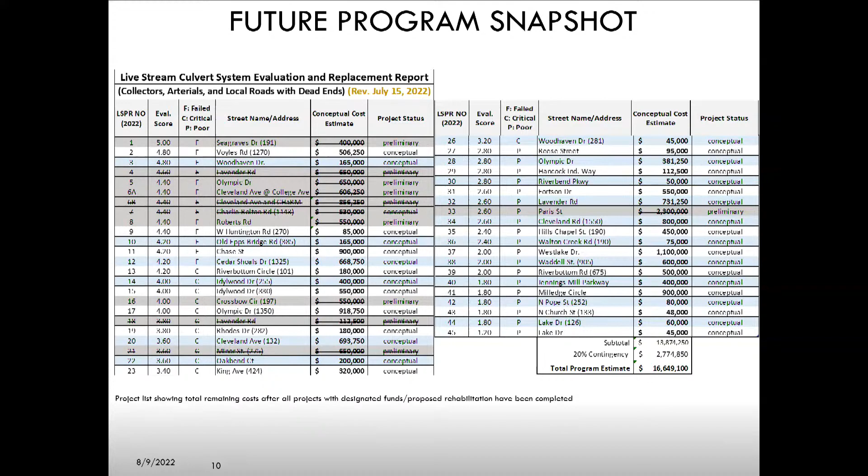Okay, so you have to change the acronym SWAC, because we've got Solid Waste Advisory Committee. That may have just been some. Yeah, I can easily do that. I'm very proud, Steven and Suki. Yeah, well done. Although Rivers Alive might let us know there's a solid waste overlap there.

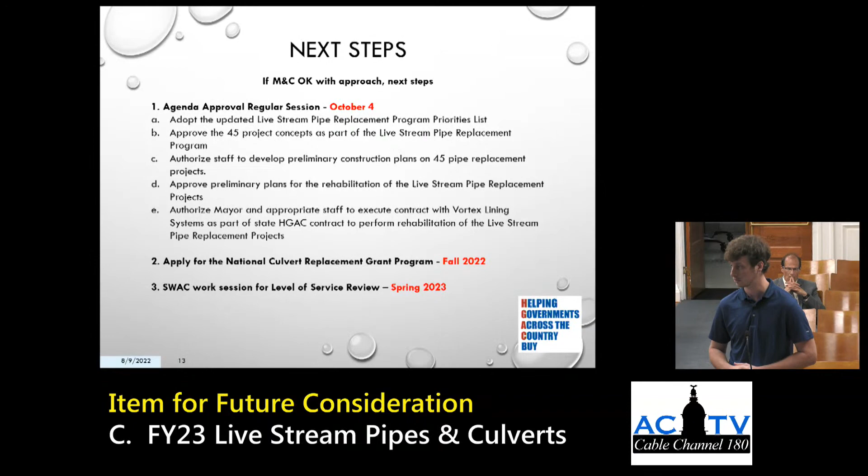Similarly to what Commissioner Myers mentioned earlier in the night about feeling prepared for a grant application with all the work that AIM has done, we feel pretty solidly prepared with all of our prioritization, our monitoring systems that we have in place, and our lists. We've gone back to 2018 and have been inspecting these culverts, some even before that. So we're hopeful, but it is a big need across the country. Looking forward to hearing more.